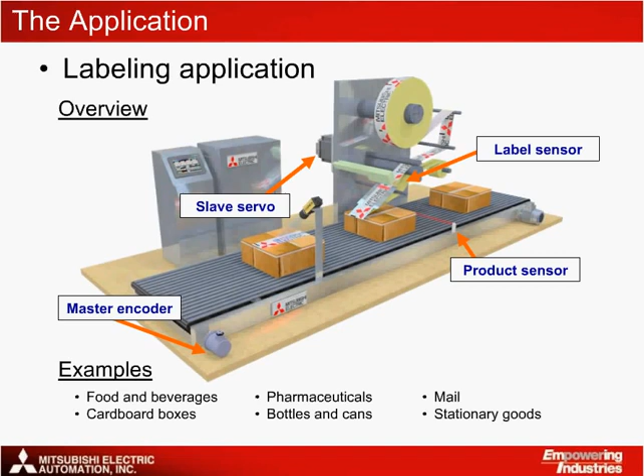A photoelectric eye is also configured above the label web, known as the label sensor, to intelligently stop the label web. After successfully placing a label onto a product, a Cognex vision system checks for barcode information or label misplacement.

Some of the example industries and applications where labeling machines are used include food and beverages, pharmaceuticals, mail, cardboard boxes, bottles and cans, and stationary goods.

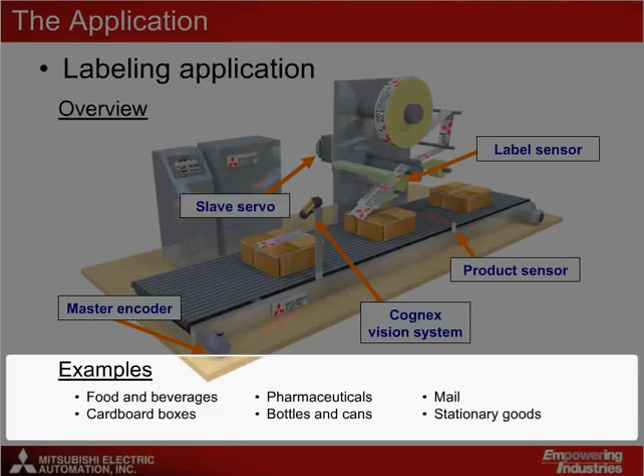In this application solution, a Q170M CPU standalone motion controller is used to control the labeling machine using Mitsubishi Electric's SSCNET III fiber optic servo network technology.

An extension rack is configured with input-output modules to control machine I/O, along with providing the option to configure high-speed inputs for product detection when more than two label heads are connected.

An MRJ3B safety amplifier is configured to control the label head in order to advance the labels one by one. Due to the low inertia mismatch between the motor and load, HFKP or HFJP motors are used.

A GT1555 is configured with a serial connection to the Q170M CPU, and a Cognex vision system is connected via Ethernet. An E700 VFD is ideal for controlling the conveyor and is connected separately to be commanded via an analog signal.

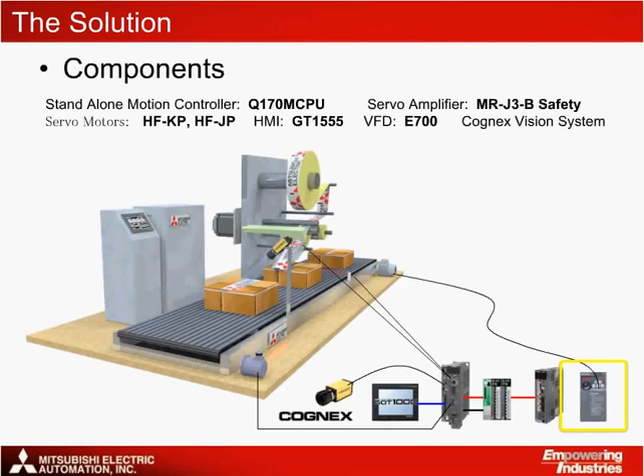The highlights that make this solution stand out can be summarized as follows.

Flexible registration programming with the Q170M CPU standalone motion controller provides up to 32 different settings to track multiple values. The MTWorks2 programming software provides a convenient setup utility to program these registration settings quickly and easily.

Servo auto-tuning with the MRJ3B servo amplifiers helps to get a machine up and running very quickly. Auto-tuning functionality in conjunction with notch filters can facilitate extremely high servo stiffness for very light loads, which can increase the lifetime of the machine by up to 20%. Auto-tuning features also result in improved machine productivity.

The Mitsubishi Electric labeling solution comes complete with Web Advance and changeover functions. The Web Advance function advances the label web when labels are missing, assuming the label sensor is positioned far enough ahead of the peel plate.

The changeover function automatically detects the distance from one label to another, which helps to reduce machine setup without the need for an operator to manually enter new label pitches.

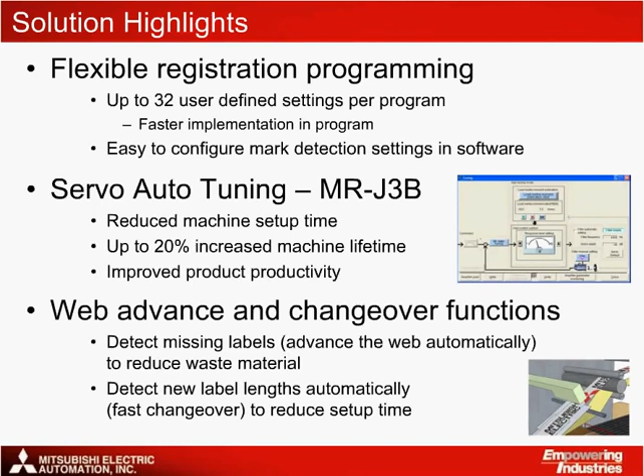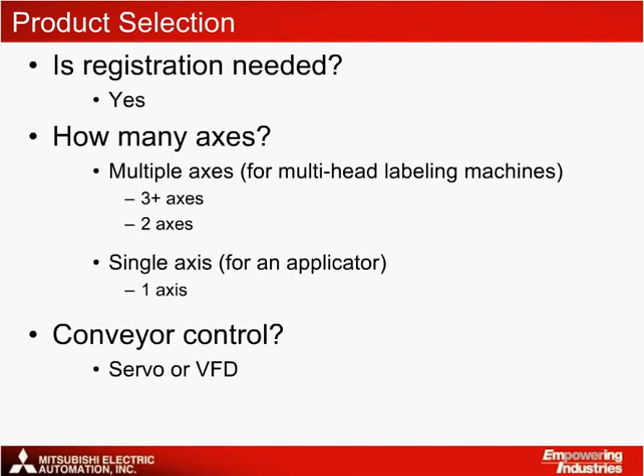When trying to determine which motion product is best for a labeling machine, it's necessary to consider several options. First of all, it's important to assess whether or not the machine requires registration. For high-speed labeling machines, such as the one in this application solution, registration is required, which essentially leaves us with the rack-based motion controllers or standalone motion controller options.

Examining the number of axes helps to refine which controller best fits the application. For multiple axes with a multi-head labeling machine, the Q170M, Q172D, or Q173D CPUs are all good selections.

For 3 to 4 label heads, the Q170M CPU, when combined with additional high-speed inputs from an extension rack for product detection, is a good choice. With 5 or more axes, the Q172D 8-axis or Q173D 32-axis motion controllers fit the bill.

When a machine has 2 labeling heads, the Q170M CPU is an excellent choice for accurate label placement since it offers 4 registration inputs, 2 for the heads, and 2 to detect the products. 2 single-axis motion controllers, or MRMQ100s, could also be configured here.

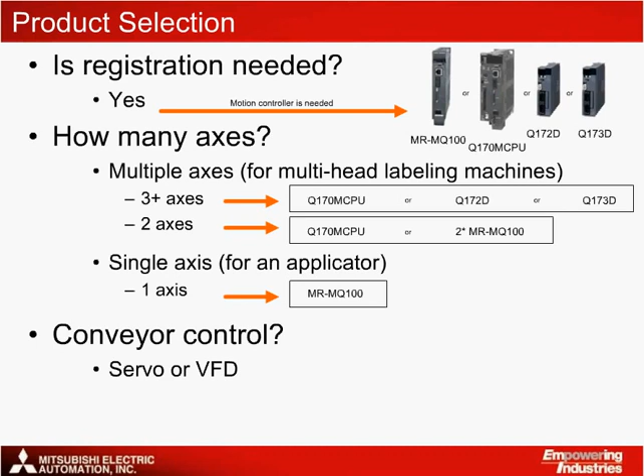For a single-axis labeling machine, the MRMQ100 is a perfect choice. The conveyor could be controlled by a servo motor or by an induction motor. In this solution, an induction motor is used where an E700 VFD is configured to be controlled by an analog signal.